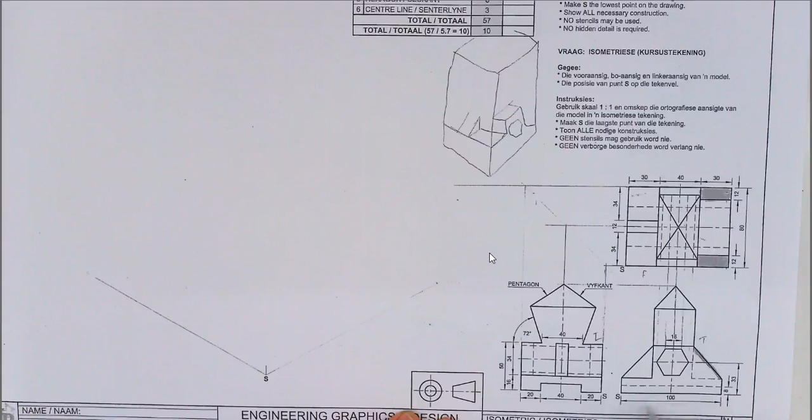This is the front view, this is the top view, this is the left view.

The first thing we had to do is sketch this thing out. Just going to make a quick sketch again, of this part of the drawing. I'm just going to make a quick box.

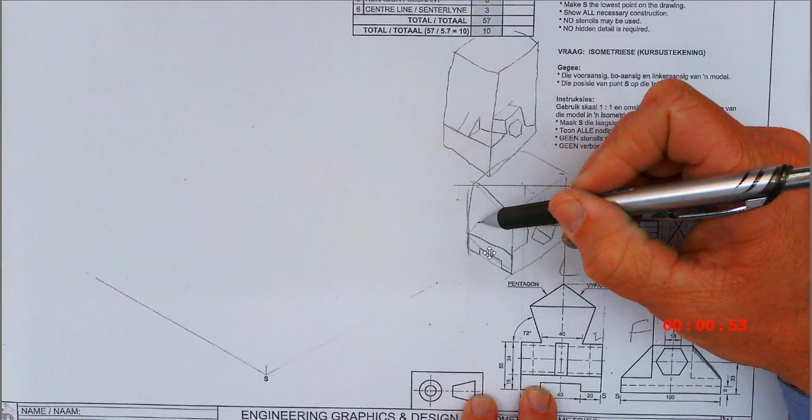It's going to go in. It's going to have a web for strengthening purposes here.

If you had a look, you remember this is the same thing. If you draw a line across, remember everything on this side is closest to you here. So that part here is this thing. This surface there must be that part.

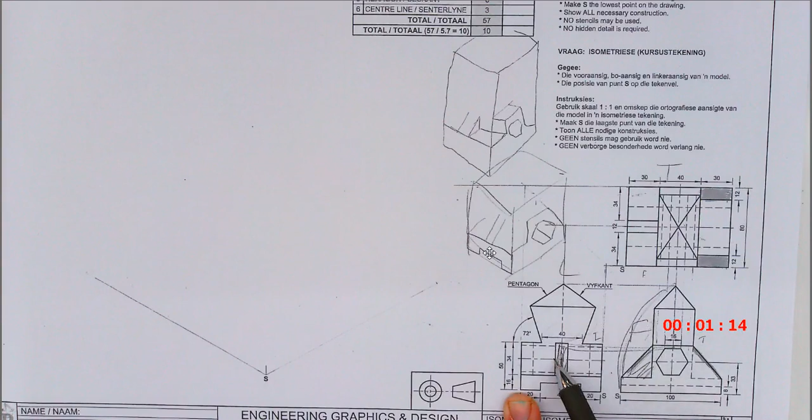Just remember, there's a mistake here. These hidden lines need to go all the way through.

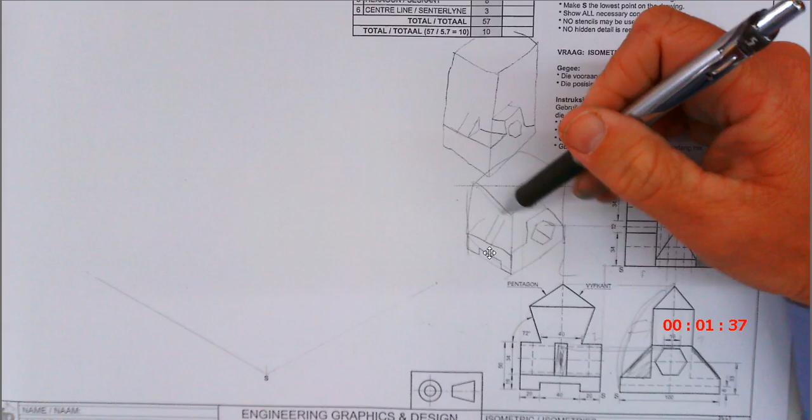It's going to run through to the other side of the drawing.

So this was the big thing by this drawing, is that you had to go and figure out what it is that was given to you. Okay, you had to figure out what was given to you.

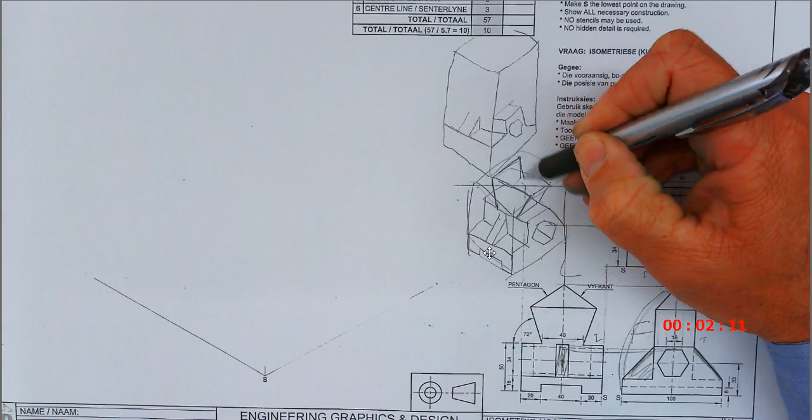And this part, looks like a pentagon, but in the middle it's going to go up, and everything is going to go to one point there at the top. Okay, so you're going to have something like this.

And if you have sketched this out once, or only part of it, then at least you know what you're drawing. Okay, so let's quickly have a look.

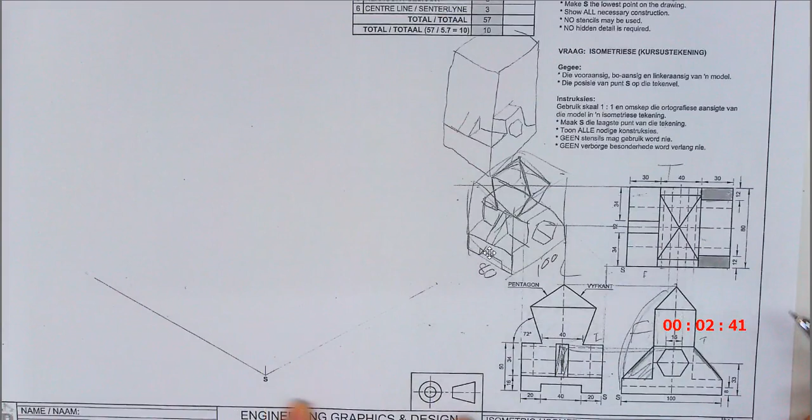This must be 100 total length. The width is going to be 40, 50, 60, 70, 80. This is going to be 80. And the height of the drawing is going to be, we don't know.

What we do know is that the bottom part here is 50. But the pentagon we don't know yet because we don't have it. So we know up to here is 50, so we can say this measurement there will be 50. But we still need to figure out the pentagon.

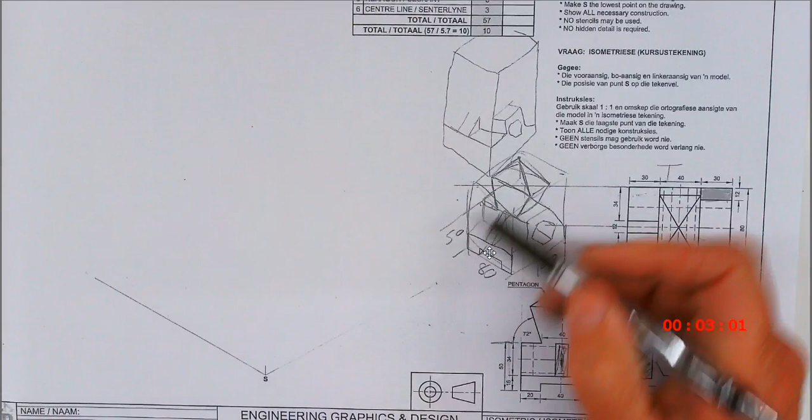Right, so the first thing I'm going to be doing is I'm going to be drawing the pentagon.

This drawing, I'm going to start by point S, so that point there. Okay, so let's start with a 30-degree triangle.

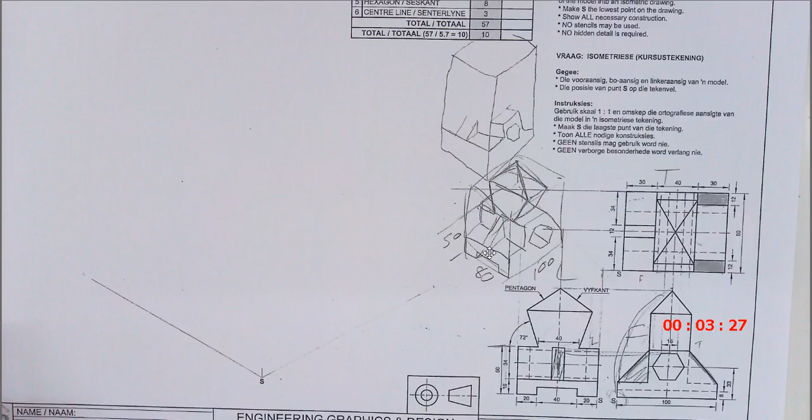I'm going to have to use this because I don't have a ruler, my ruler for this is not here. Okay, but I'm going to keep this on this line. Okay, 30 degrees, going to draw a line here.

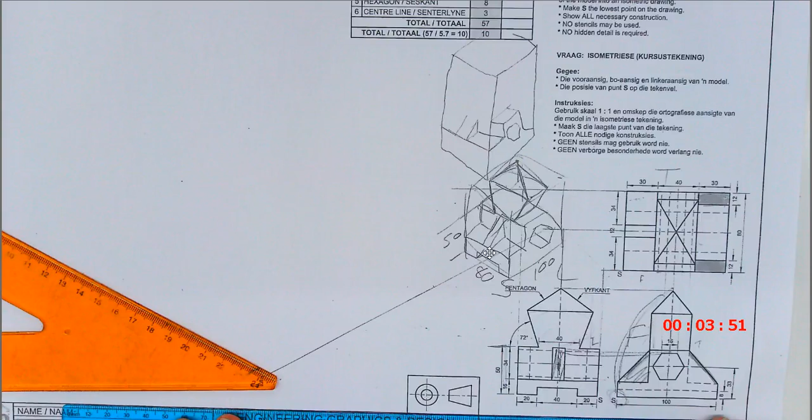Just quickly put this on there again. Come on.

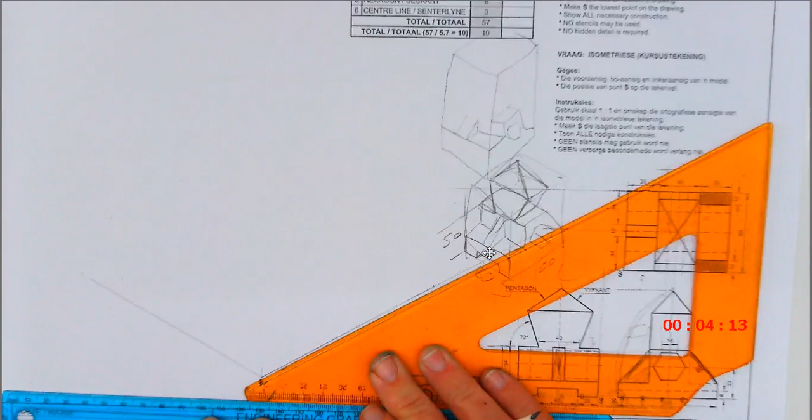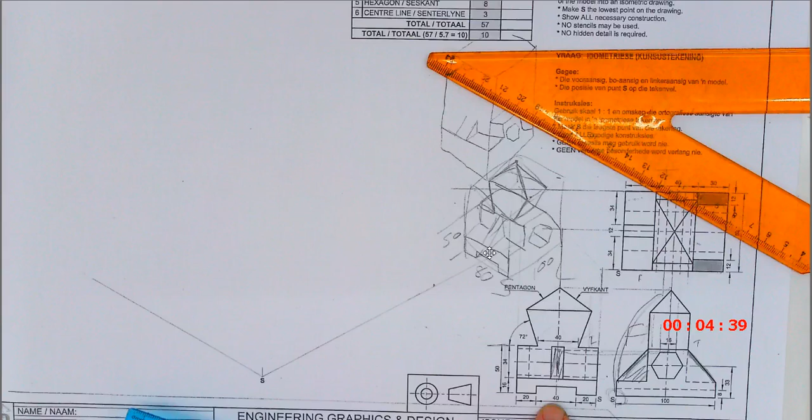Okay, so now what I'm going to do is measure off 100 millimeters on this side, so 100 millimeters on this line. On the other line, I'm going to measure off 20, 40, 20, which gives me 40, 50, it gives me 80.

So there's the 20, 20 from this side, and it should be 10, 20, 30, 40. There's the side of the drawing.

Now the height, we don't have the total height, but we have the bottom part. So I'm first going to draw the bottom part of this thing, which is 50, so I'm going to draw the 50 up.

I want you to work with me. I don't want you to sit passively and just have a look. I want you to do this with me as I'm going along.

Drawing a line here, this line must be 50 millimeters.

Okay, right. Now from this point onward, your accuracy is going to be very important. Okay, so I've got 100, I've got 80, and I've got 50 here.

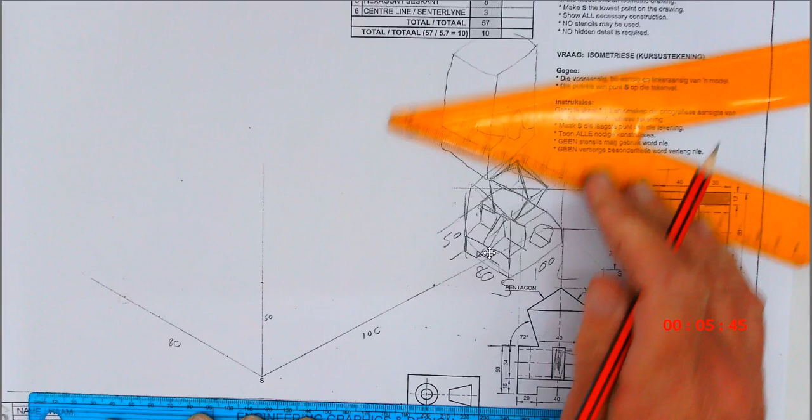So I'm just going to draw the bottom part yet. Not too much thinking now, because I have the sketch, so I don't have to think about it. I must just start creating the box in which the bottom part of this drawing will fit into. I'm going to have a line there.

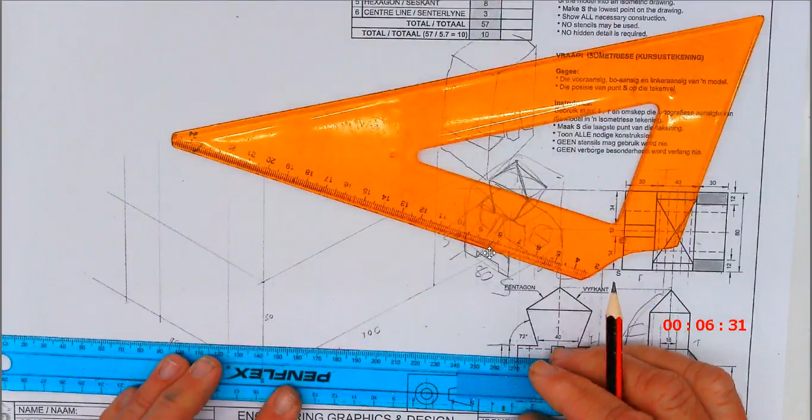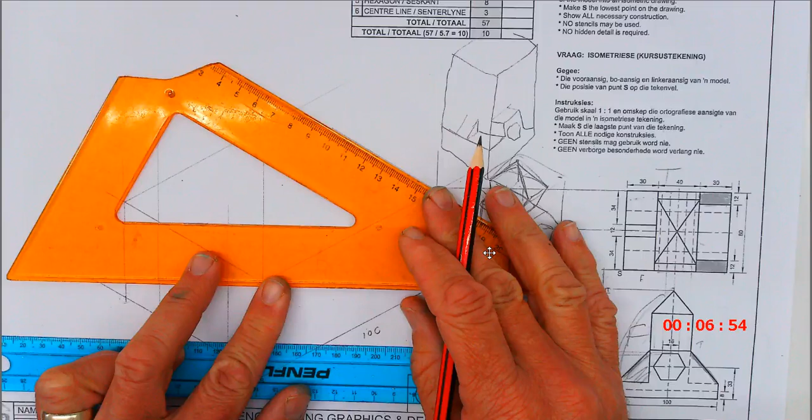I'm going to quickly draw this line through. You can see how I swivel my 30-degree triangle, just swiveling it every time. I don't have to measure again if I've measured off once.

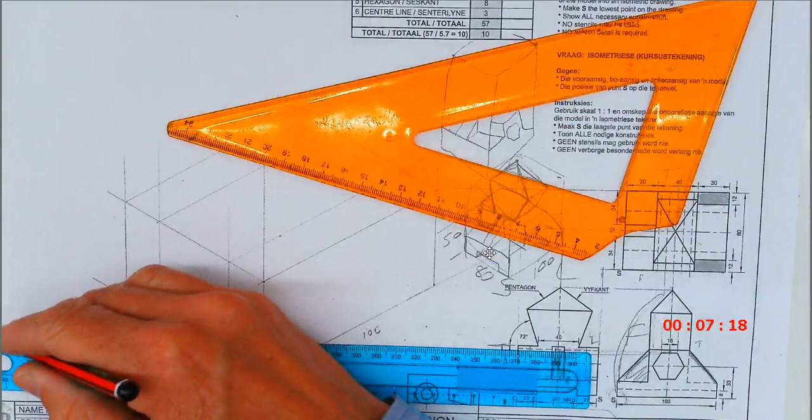Remember, I've made a line here at the bottom of my page for myself, because I'm not using a T-square now, which is the right thing to actually do, but I don't have one here, so I drew a very visible line at the bottom. So I know every time I must make sure this ruler stays in that position. Now I've drawn the bottom part of this object.

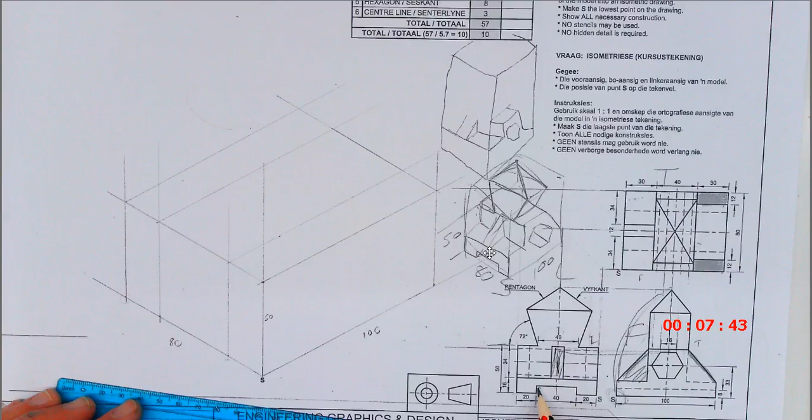From here on, it's really not difficult. It's 20, you guys can see the 20. Now I need to go up. According to this drawing, if you look in the front view, this is 8 millimeters. So you're going to go 8 millimeters up.

Just going to work parallel there to save a little bit of time. So 8 millimeters there, 8 millimeters there.

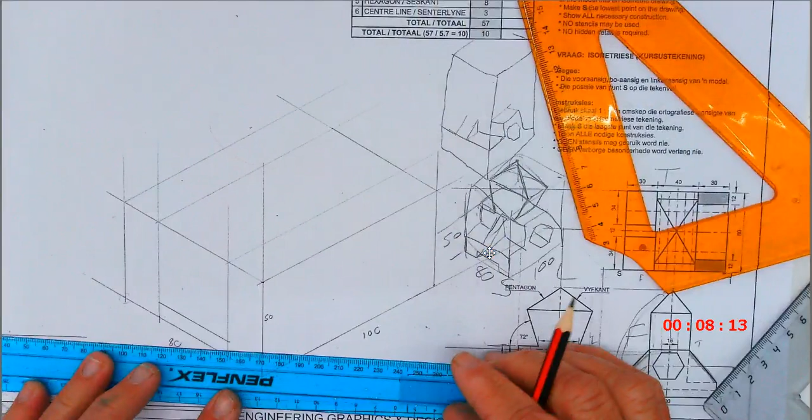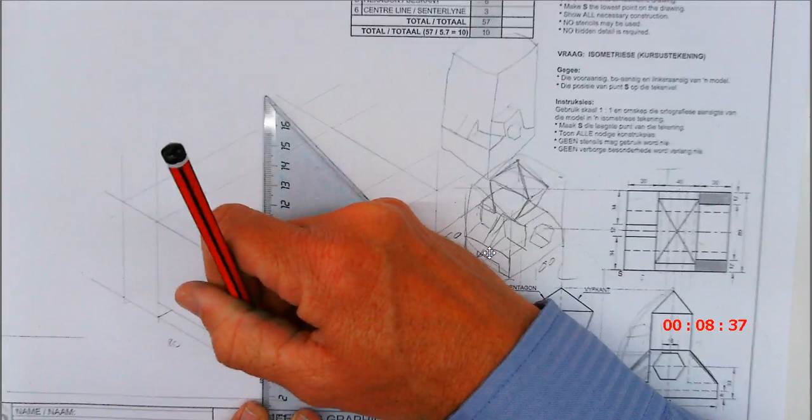Now, this line here at the bottom shouldn't be there, so I'm going to erase this a little bit later. Then I see it's 16 millimeters here on the side, so I'm going to measure this off. So 10, 15, 16 millimeters.

The only reason I'm doing this is to save some time. I'm working parallel with the bottom line there, so I'm just going to draw it through, especially for kids in schools that don't have all the equipment. If you have a ruler and a triangle, it's going to take obviously a lot longer, which is not ideal, but you're still going to be able to complete this drawing with a basic mathematical set, with a compass and the little triangles. But it is better to have a drawing board, obviously.

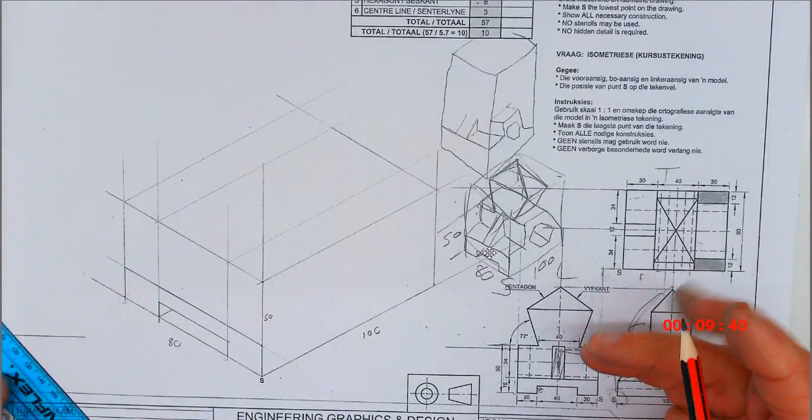I'm going to be drawing this side here, just going over these lines. Remember, as you're drawing, if you do assignments, 30% of the marks are allocated for neatness and line quality. So you can have full marks for the drawing and still get 7 out of 10 if your line work is not good. So don't fall into that trap.

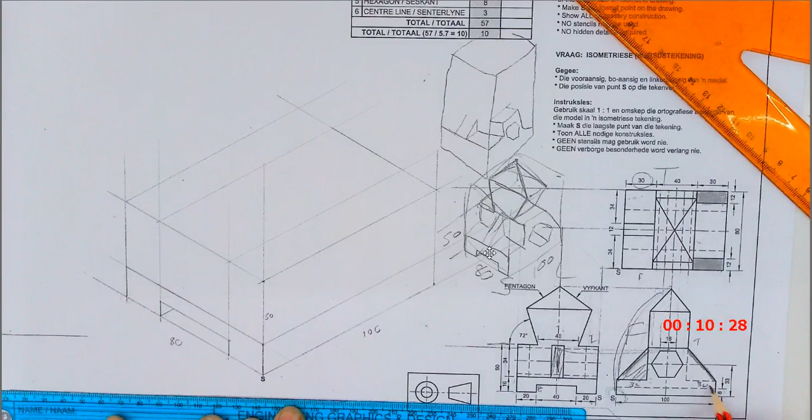Let's just see what this width is. Now you'll see I don't get the width here, but if I look in the top view, I see it's 30. So that part is 30, this part is also 30, and the middle section here is 40. So I'm just going to measure this off, 30 on both sides. 30 on this side, and 10, 20, 30 on this side of the drawing.

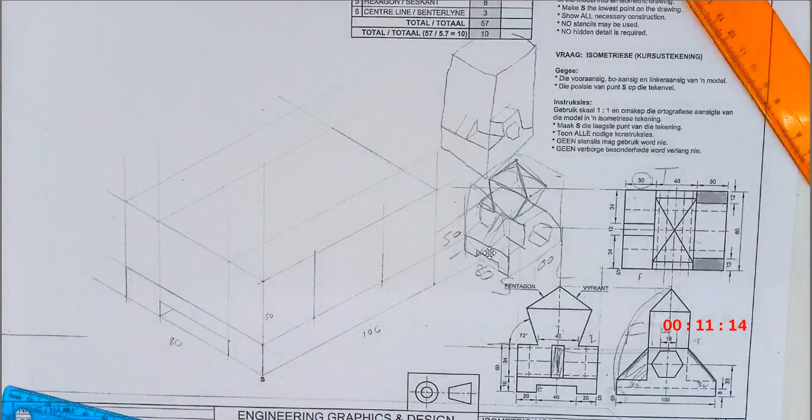Going to make a construction line there. So I've now drawn that piece there. I've got that point. You see I'm working with a box because it makes it easier.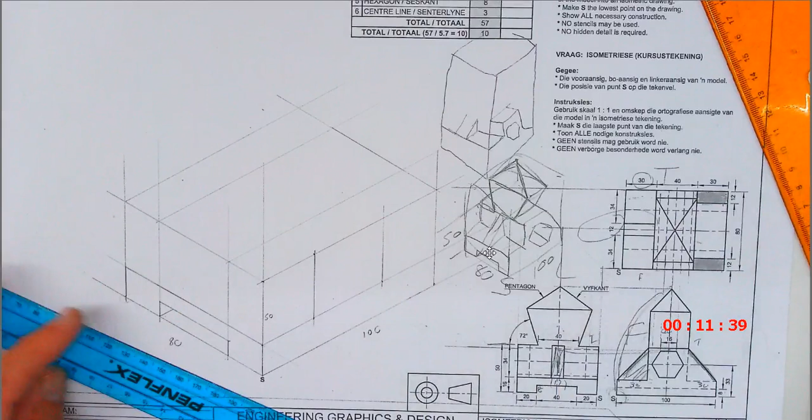And now in the middle, this thing in the middle is 12. I can see it in the top view once again. There they tell me it's 12, so this must be 12 as well. So I can get the middle and just measure 6 millimeters to each side. But before I do that, I'm first going to draw in the upper part of this block. I'm going to quickly complete that.

I'm going to draw the 30-degree line in from this side.

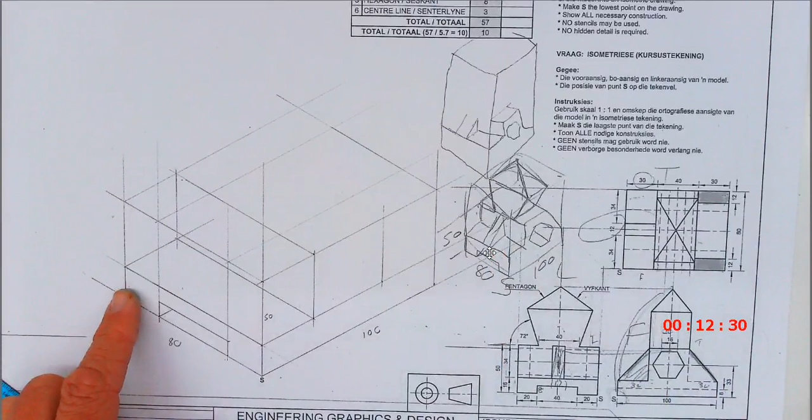Now you guys can see I've used the whole block. I've created this whole section here on the side. This is still the easy part. And I'm just going to get the middle. This is 80, so I'm just going to measure up to 40 millimeters here.

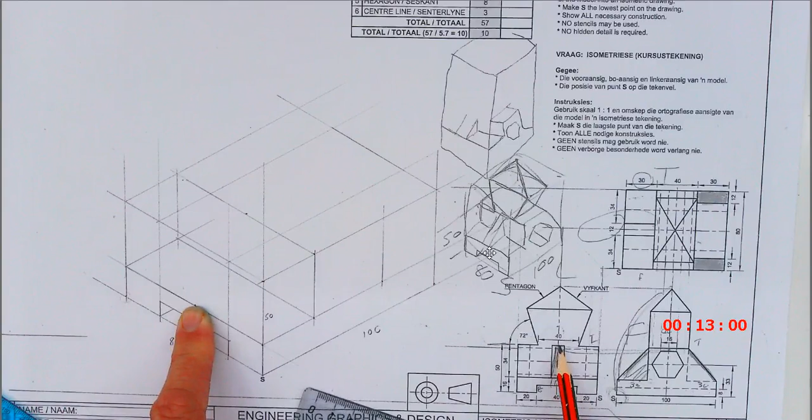I'm going to do the same thing over there. I'm going to get the middle at the top and the bottom, so I measured 40 in, 40 in. Why? Because then I'm in the middle of that little block there, and I'm also in the middle at the top where this thing is going to end. It's going to be 12 there and 12 there, which means I'm going to go 6 millimeters to every side there. So here at the bottom, I measured from the side 40 to get the middle.

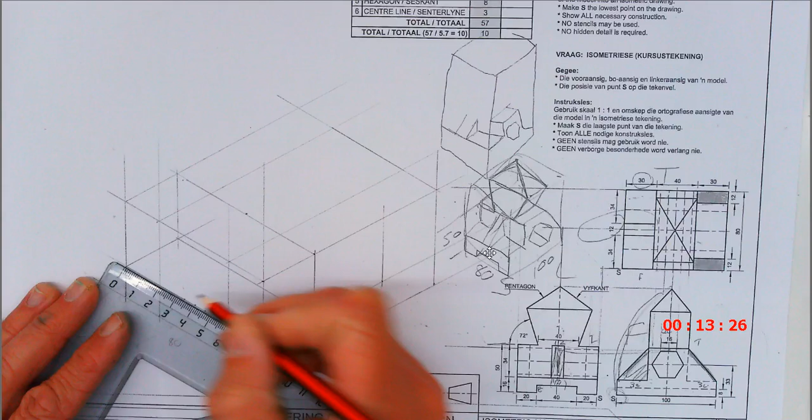Now I'm going to go 6 millimeters to one side, and 6 millimeters to the other side of the drawing here. And I'm going to do the same thing at the top. I'm going to go 6 millimeters to this side from the middle, and then also 6 millimeters to the side there. And now I'm just going to complete it.

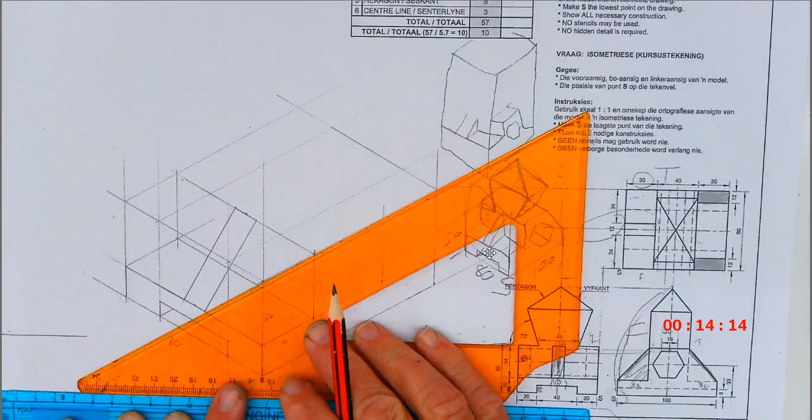I'm going to draw this in. So there's this part. Okay, there I accidentally made a double line, I'll have to erase it and fix it. Okay, so this is the easy part of the drawing.

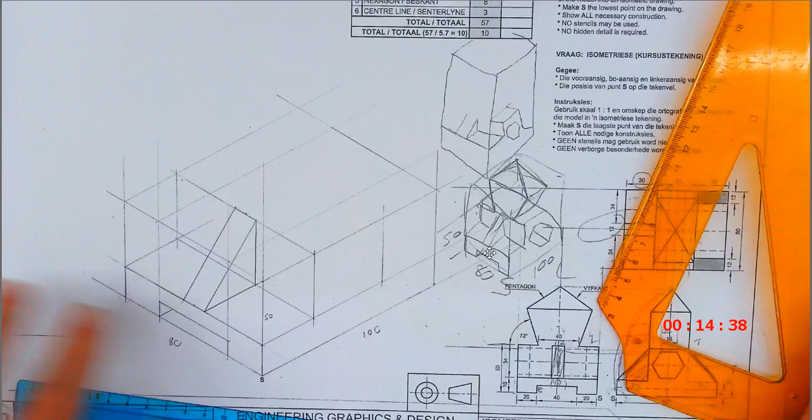I've done the construction, I've done the base part of this thing. There's a line that needs to run here from this side to that side, an angled line. There's going to be a line there. I'm also going to measure the same width.

Guys, there's talking going on underneath. Have a look on the board. Just follow what I'm doing here. Don't sit and do other things. Check what I'm doing and then you draw.

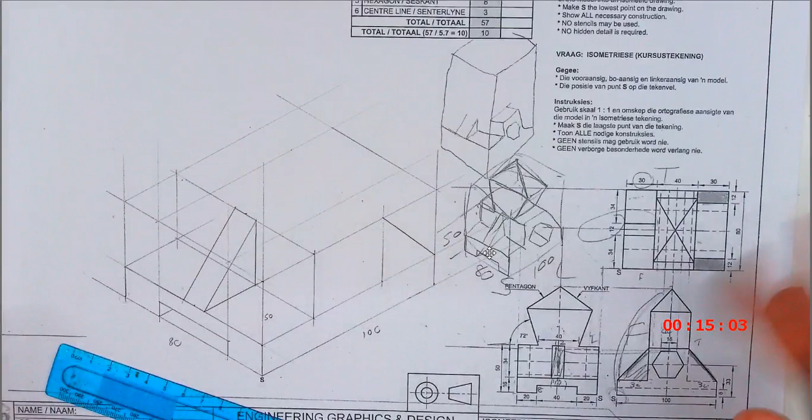But have a look, this is 20, 40 in the middle, 20. Guys, I've created a whole block, 100, 80, and 50 high. And then I just added these measurements in.

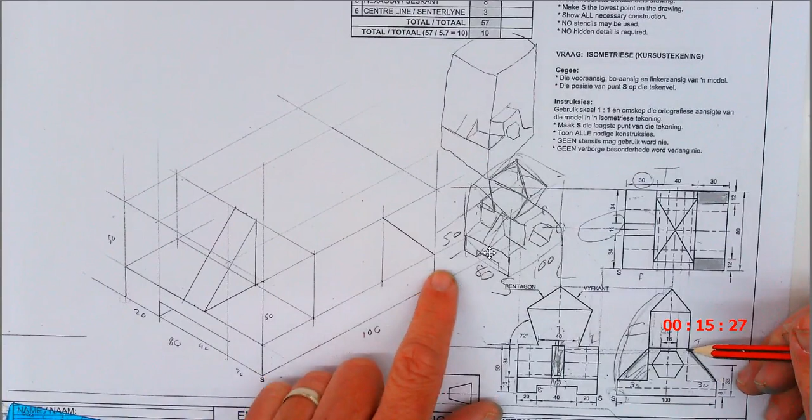I had to go and sketch this out. That point and that point is the same height as the front, so I just took a line from there to there. This line I can make dark. Put a dark line in there.

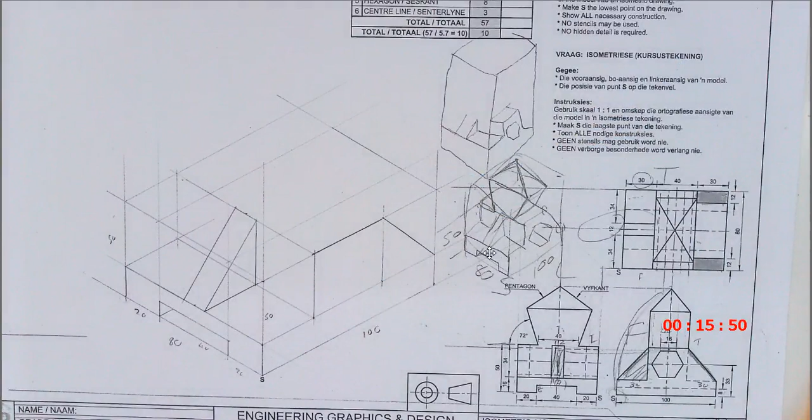Now I can have a line running all the way through. This is 40 millimeters or 4 centimeters, so I can have the same thing here at the back. I can just draw a line through like this.

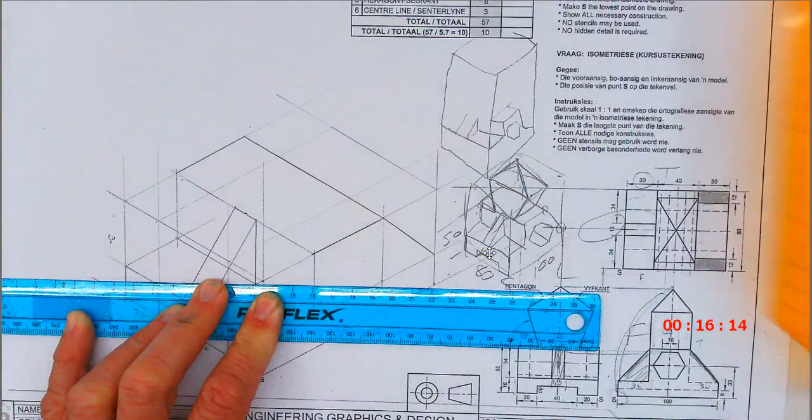Okay, I am going to erase a few lines later. So this is the bottom part of the block. You're going to see nothing that lies here at the back is visible, so you don't have to worry about the side part of the drawing here.

But you do need to draw with this triangle, with your 30-degree triangle. You cannot wing this, you cannot just put your thing down and start drawing lines. You have to use your equipment.

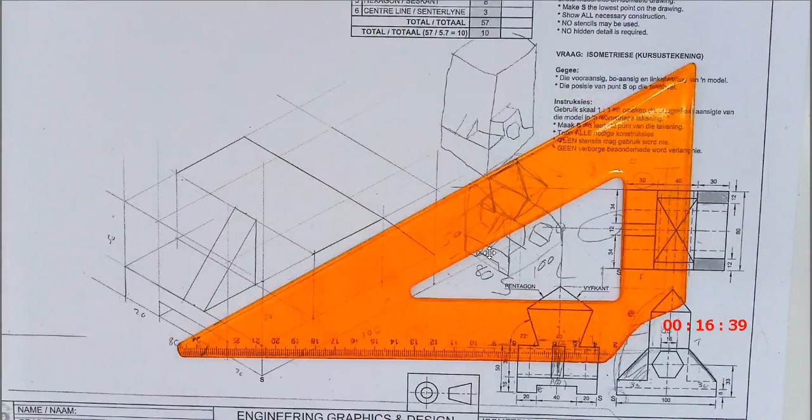Right, now we're going to get to the higher order part of the question, and that is the part where you're going to have to draw out the hexagon and the pentagon and so on. Now this is the part where you guys will have to focus really well.

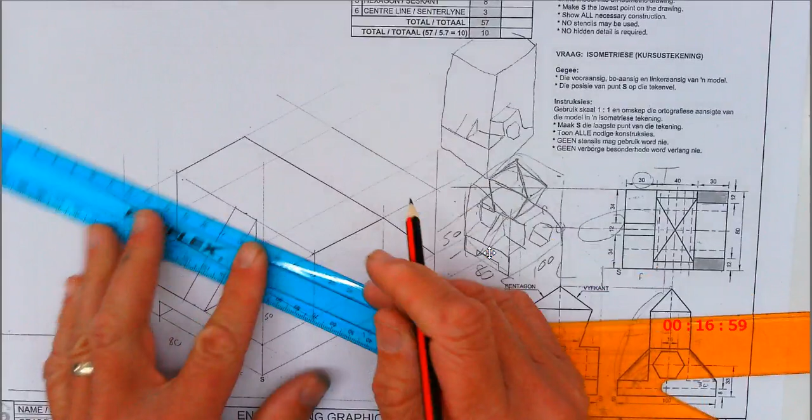I would rather you listen now than draw. This is the part where you should rather have a look at what I'm doing than sitting and drawing and missing the point. Okay, so the first thing I'm going to be doing is I'm going to be drawing a hexagon.

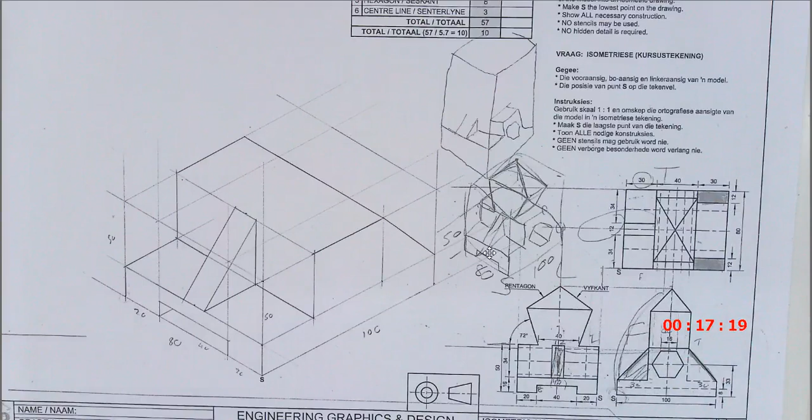Now, you guys know by now, what's the quickest way to draw a hexagon? With a compass. Okay, this bar. So,

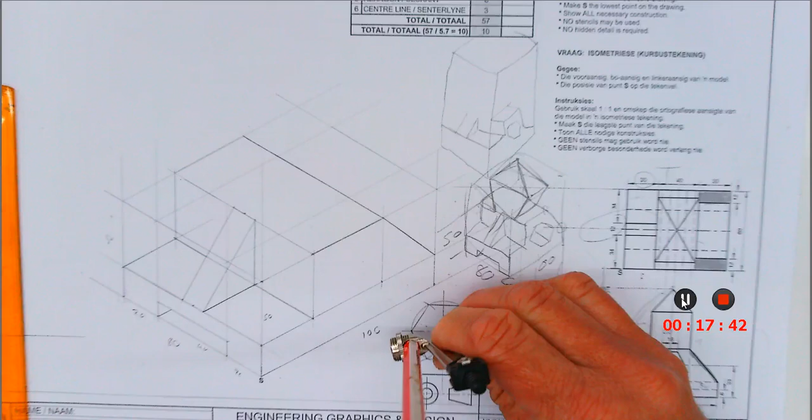So what I just did is I drew a hexagon. I took, they told me it's radius 16, so I drew a circle with a radius of 16. I drew a center line there, I started marking off on the center line, I marked it off top and bottom. I took it to the other side, did the same thing, and that gave me the hexagon.

Okay, now I'm going to have to draw this hexagon over into the isometric. How do I do this? Now, everybody must listen now. If you haven't listened, like I said, now's the time to give your full attention to what I am going to show you. Okay, go and put this hexagon in a box.

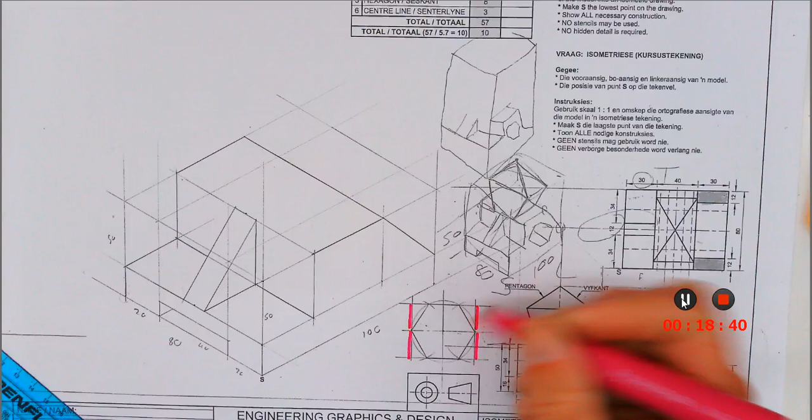So if I'm saying in a box, I mean not the circle, but the edges of this hexagon needs to be in a box. Okay, so this is going to give me different measurements. These measurements that I'm going to draw here and here and there will be all the same. And the measurements I'm going to be drawing here, they will be all the same. This one, this one, this one, and this one.

Now there's many ways that you can do this. There's more than one way, but I would say we have to use the center point of this object. Why? Because they give us the reference for that point, for that hexagon, by using the center point.

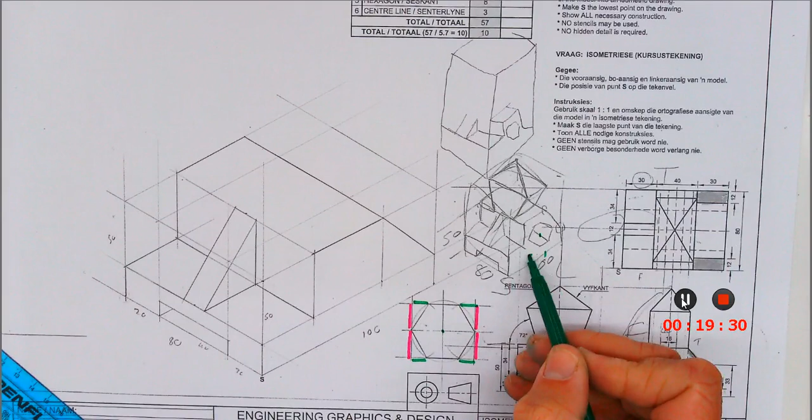They say we can see it's in the middle and it's 33 millimeters up. So this is going to be 33 and this is going to be how much? 50. Why 50? Because it's in the middle and the whole thing is 100. Okay, so to get the middle there, it's going to be 50 in and it's going to be 33 up to get the center. So I'm quickly going to do that.

If you haven't done this thing yet, you can quickly draw that out. You can quickly draw this out. I'll do the pentagon in a moment. Right? Thank you.

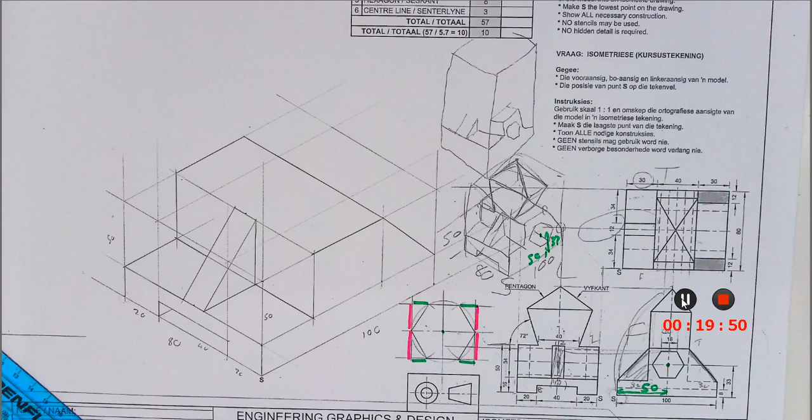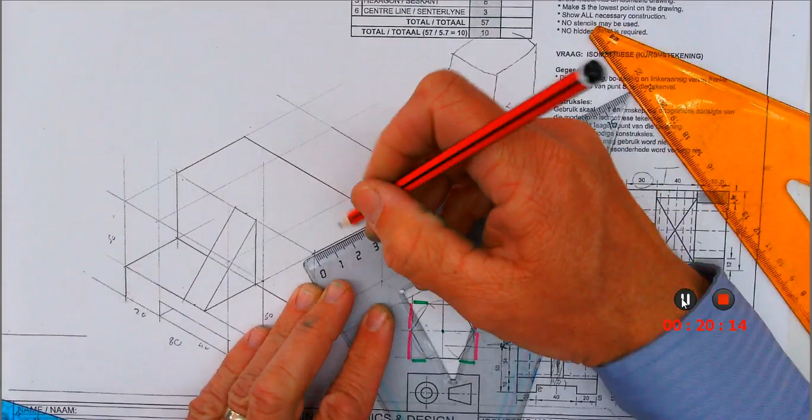Okay, so now let's quickly do the hexagon. I'm going to measure off 50, or you can just get the center of this middle part. The center of this middle part is 40, so I just get 20 millimeters here. Then just go down, or you can measure 50 in. It's going to be the same thing.

So I'm going to draw just the center line here. Why a center line? To tell me that I'm working with the middle of something here. I'm going to measure 33 millimeters up from the base there. So from this bottom, I'm going to measure 30 plus another 3 millimeters, and that is going to be the center of my object.

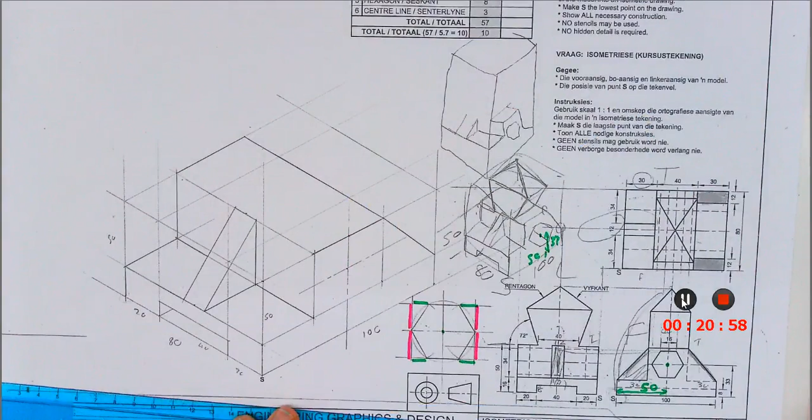So I'm going to draw another center line here. So that you can put in, and this is now obviously the same thing. That's the vertical line, that's the center line that's now running at 30 degrees.

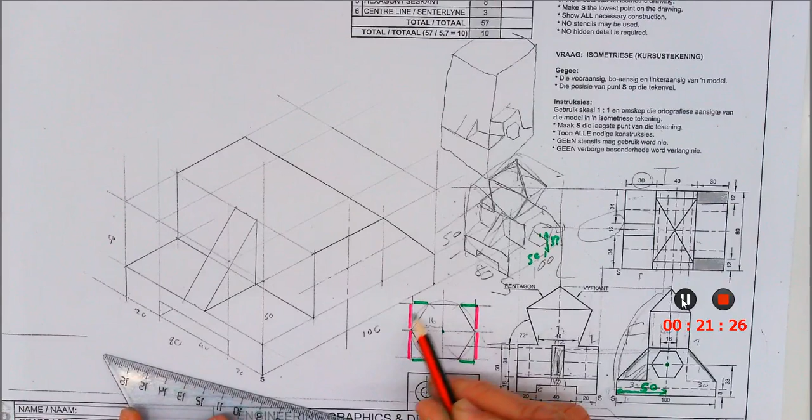Okay, so what do we do now? Now we're going to use the center point, and we're going to measure sideways. How far is it here from the middle to the side? What is this distance? It's 16, because I drew a circle with a radius of 16. So I'm literally going to measure from the center here, 16 to both sides. 10, 15, 16, 10, 15, 16. So 16 millimeters to both sides.

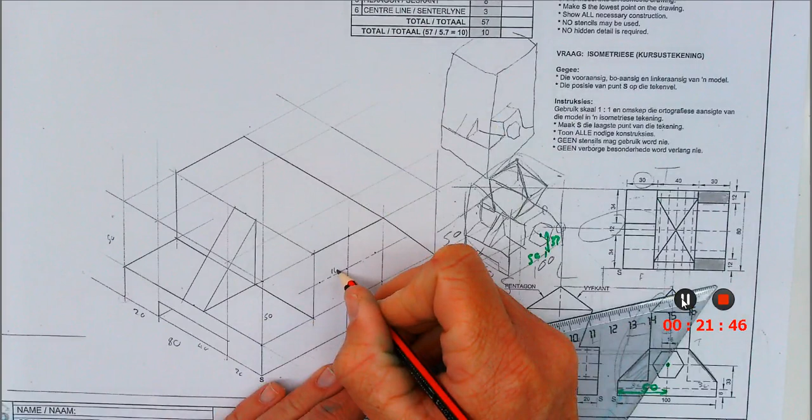So I measure 16 here, I measure 16 there. Why do I do that? Because this is 16 on that side, and this is also 16.

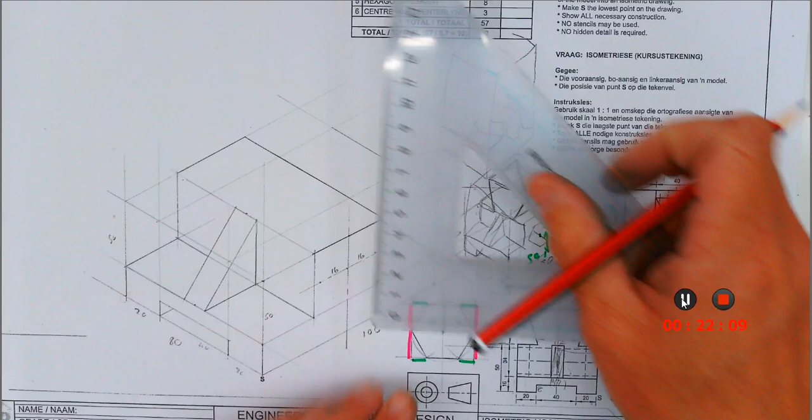Now I'm going to go vertically up. Now let's see what this height is. You're not going to find this in another way. I need to measure this, and according to my drawing, this is 14, 1, 4. So that distance here is 14. So the pink lines are 14, and the green lines we don't know yet, but the pink ones are all 14. So I can literally go and just go 14 up.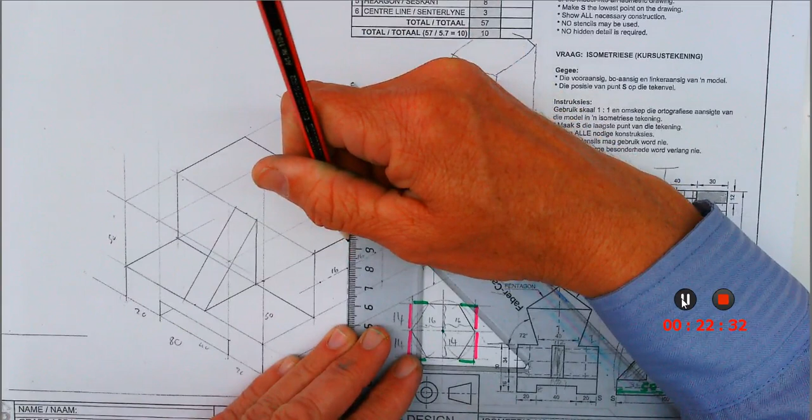So from the middle, 10 and another 4, 10 and another 4 millimeters. There we go. So this is 14 and 14. And I'm going to draw 2 more 30-degree lines here.

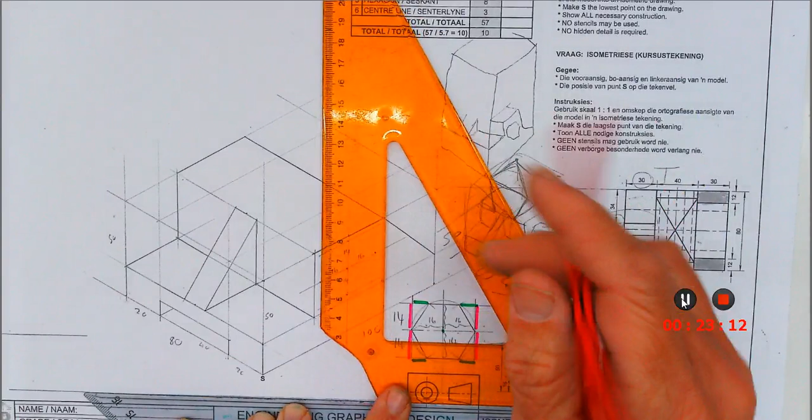I'm going to draw a construction line here at the top, construction line here at the bottom. I'm going to do a vertical construction line here, and another vertical construction line over here. And now all of a sudden, what do we see? We see the same box, the same box that you had over here is now also over here.

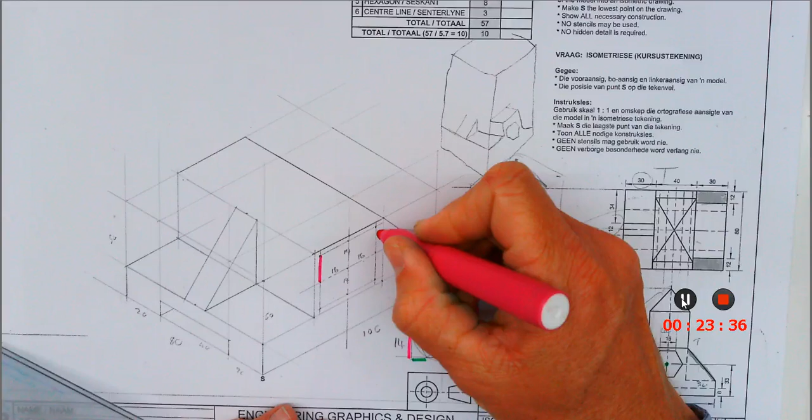Here you can see the pink lines. There's the pink, the pink, the pink, the pink. Same.

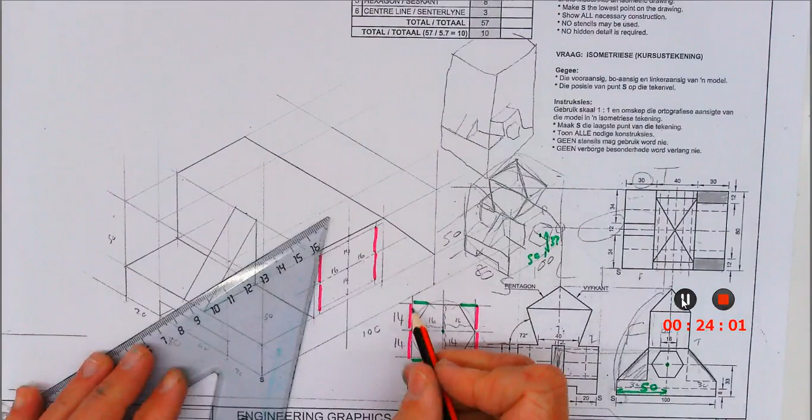Okay, and now you can do one of two things. You can either measure this measurement in, or you can measure from the corner to that point. It's up to you, okay. So I would go for measuring from the corner.

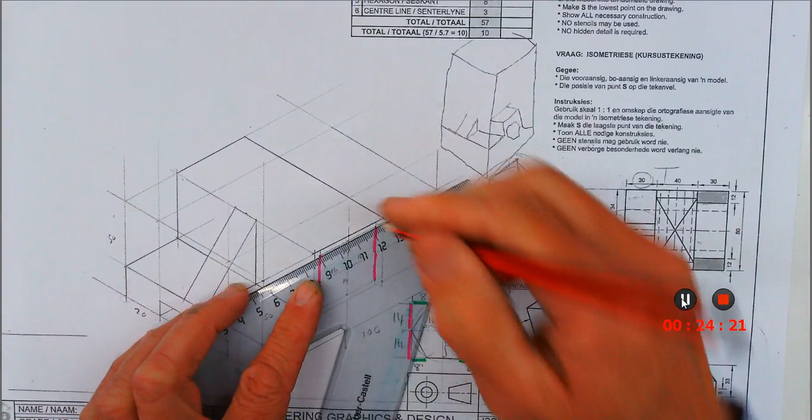That is going to be, in my drawing, it looks like 8 millimeters. You can check what yours is, work according to your drawing. So I'm going to measure 8 millimeters in: 5, 6, 7, 8. Eight millimeters on this side.

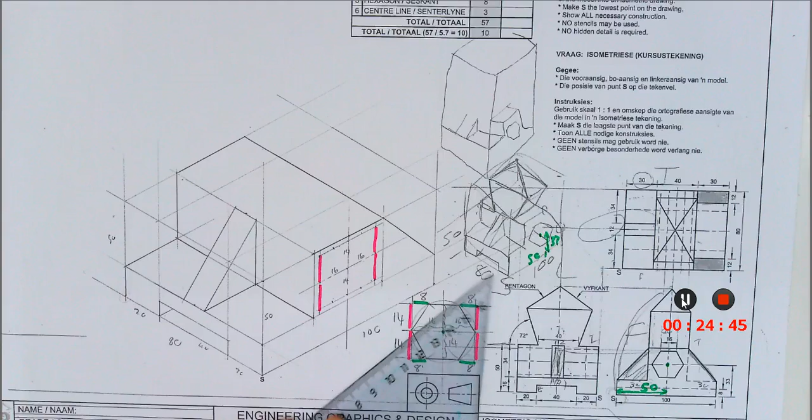I'm going to do the same at the bottom, or you can just draw through. I'm going to do the same thing on this side, 5, 6, 7, 8 millimeters. Okay, I'm going to do a little construction line here, just a faint construction line. Okay, now you will see the green lines.

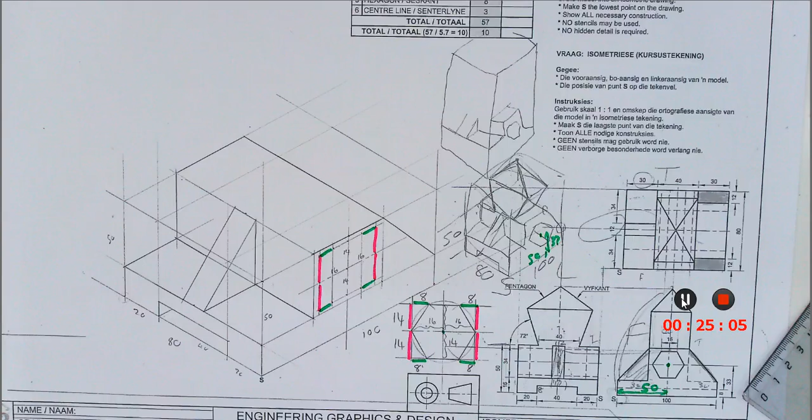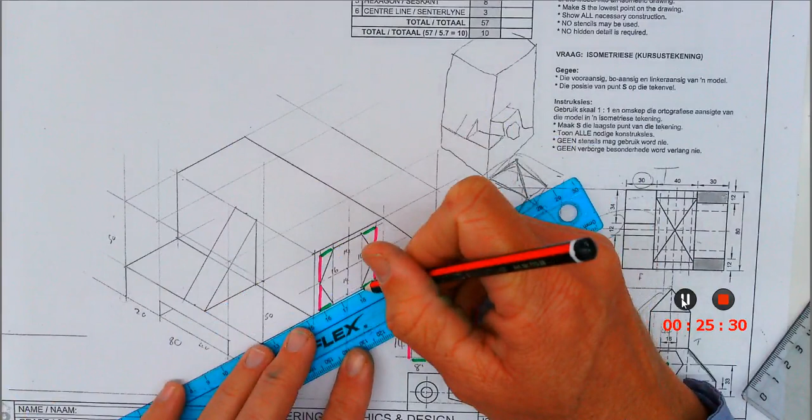Can you see what I did? It's the same thing. You have to follow this method if you want to be able to do this. And once you've got this, now I can just simply go and connect the points with one another. This one, over here... there's my hexagon. Okay, so once again, the same width you've got here is the same width you've got here.

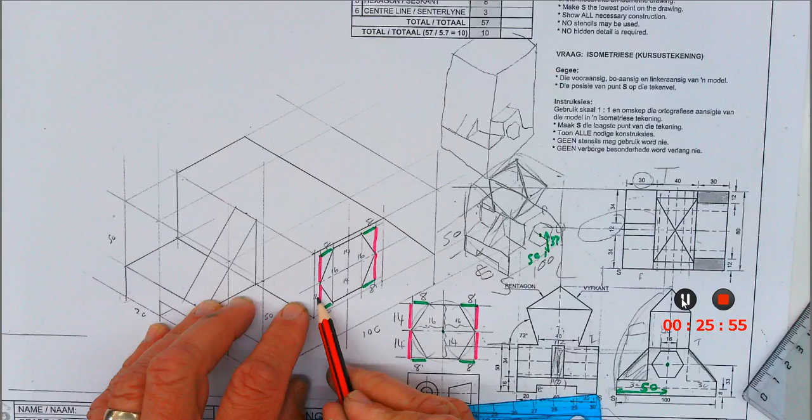The same height you've got here is the same height. But I cannot measure these lines. That's why I have to go up and in. The up is the pink, the in is the 8 that you guys have seen already. So that's 8. The height here was 14, 14, 14, and 14.

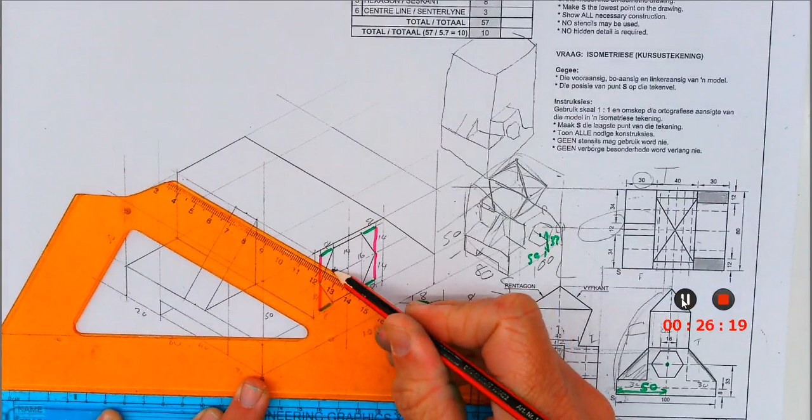Okay, right, so I have to draw it out, then I use those measurements to get this. Now this is a thing running all the way through, so I use my 30-degree triangle. I place it there. From all of these points, I'm going to have a line running through. Why? Because it's a hole. How do I know this? I can see it here that they show me the hidden lines go all the way through the drawing. That's how I know that should be like that. I'm going to stop here.